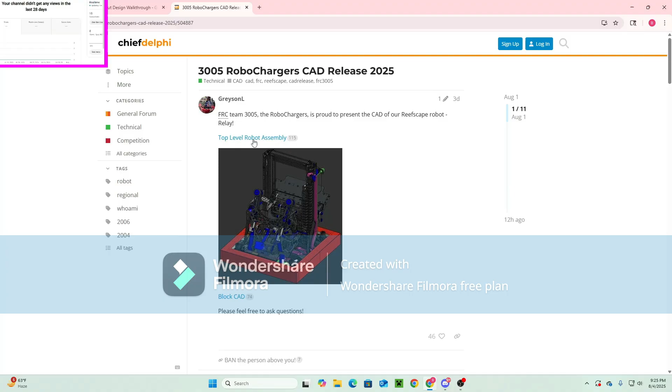The big part about this end effector design is it's using a centering flap for mechanical auto-align scoring. And the RoboChargers' design is really where most of the inspiration for this mechanical alignment scoring came in. This was their end effector system, and what they would do is they would use this flap to mechanically align to reef branches by ramming this into it and score efficiently that way. And as you can see with my design, it is incredibly similar. It has another very similar version of mechanical reef aligning, but there are of course some differences which I'll explain as I go on.

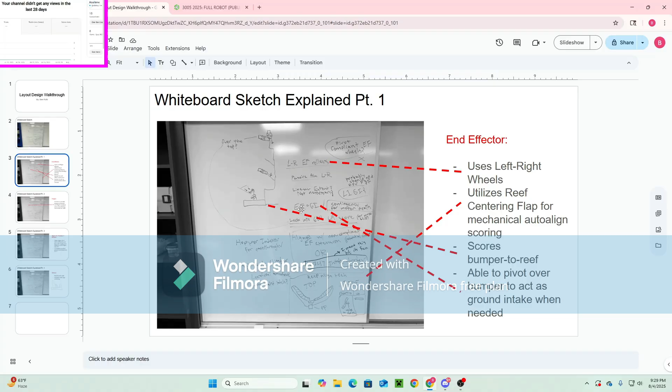It will score bumper to reef, so it's better for drivers. We can ensure that the angle of our robot is the same on scoring every time if we just ram into the reef. And one of the main parts of this design, which I did not sketch, is this whole system is going to be on a pivot which can rotate out and over the front bumper and act as a ground intake when needed. So, that's the end effector explained.

The hopper, it's the same angle as the reef branches. It's as low to the ground as possible so that you can chuck coral into the robot while it's maybe even a foot away from the coral station. And it's indexing coral with a series of compliant wheels.

Something that I very much wanted to design, at least, is a 2847 style algae intake and shooter.

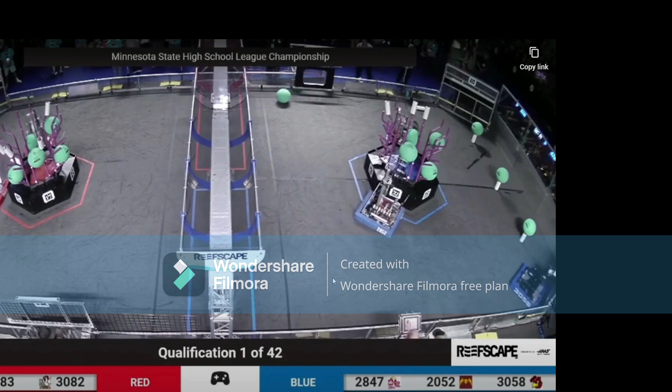Starting zone and scoring in that autonomous grid. Now we're into teleop. Drivers have taken control. Oh, very close match, all tied up at 50 apiece. A lot of scoring going on. Blue Alliance just delivered not one but two to their processor, and the Red Alliance human player gets those, shooting it and tossing it into the net.

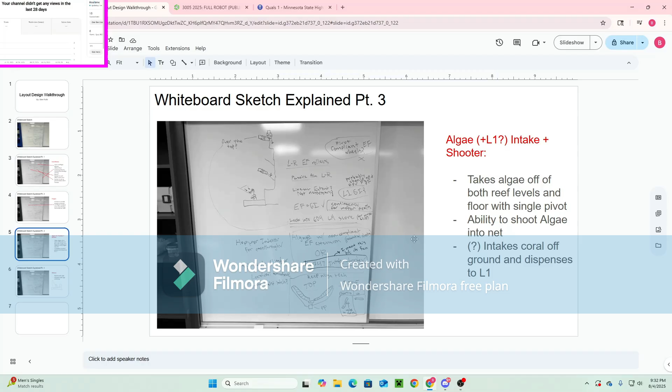I think this style of algae intake is incredibly awesome in my non-expert opinion, and I would really love to build it myself. So this is the mechanism I'm very interested in designing, and I did plan on having a different form of algae scoring that would have been attached to the elevator, but I chose to opt for this other option because of two main reasons. One, I want to make sure that if the end effector wheel motor is broken, this robot can still do something else in a match other than climb and play defense. And two, I really want to design this, and I think it's going to be fun.

Then I had a simple idea for a climber. I want to do a Rest Town style climber and do it right this time. And for my idea, I didn't entirely sketch it out here, but you basically have one half of a triangle on your climber here, and what that allows is for the first pull of the cage to always center in.

What this triangle does in terms of mechanically aligning is it allows you to ram into the cage and not care about whether the cage is going in this position. So those 4 circles would be the 4 bars of the cage, and in that position you can actually have issues where you don't climb correctly, so this kind of solves that problem. And I think it would be way better for mechanically aligning than the solution that I tried to cook up in season.

So that is basically my whole design that I've sketched out already, and now I'm going to be tracing it out in a layout sketch form, and then going at least into a little bit of detail on all of the mechanisms themselves individually.

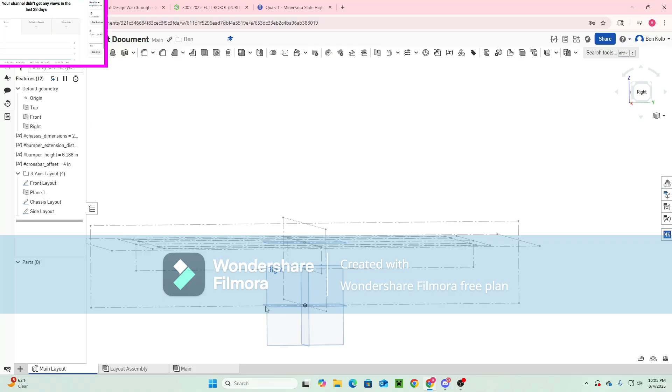Alright, so when thinking what to do first here, there's really multiple things you can do. What I want to do is going to be a little bit out of the ordinary. It's actually going to be creating a new part studio and call it Spacing Simulator. What I'm doing here is I'm just using this part studio to sketch out specifically where I might want my wheels to be.

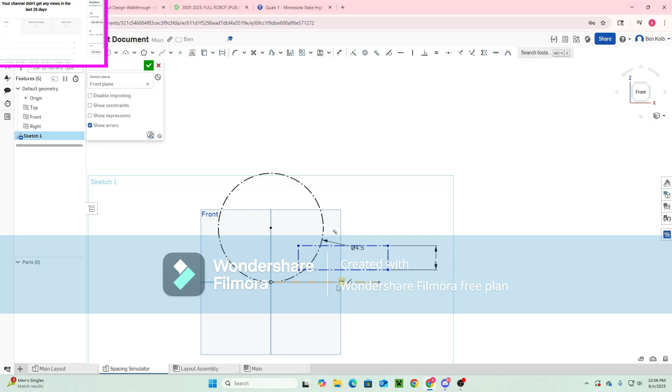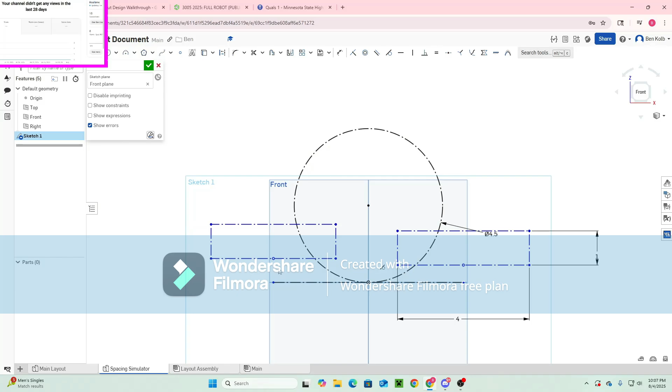What diameter wheels? In particular, I like 4-inch diameter wheels because they have the widest area you can get for compliant wheels. And what I'm going to do here is I'm going to model 2 wheels, and I'm going to use some constraints to make sure that they are in the same position on the x-axis of the coral. So now I can move them around, and they're going to be at the same position. Now with more constraints, I can make them fully constrained. So now they're always going to be at the same place relative to the coral.

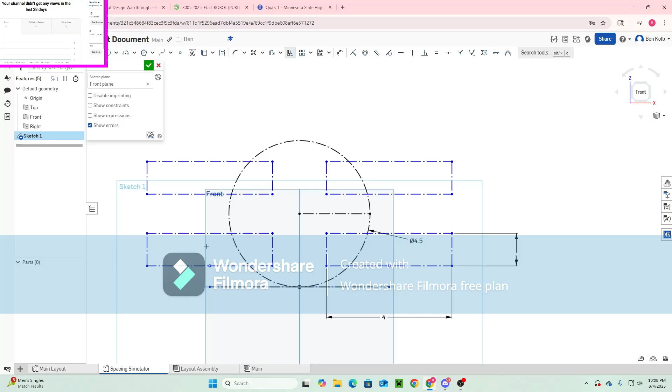Now what I'm going to do is I'm going to do a simple radius line from inside the coral, and I'm going to mirror the 2 wheels. And now I have exactly what I want. I want to be able to play around with the wheel spacing to see how far they come in contact. That looks good to me. So now I have the basic layout of how I want my wheels.

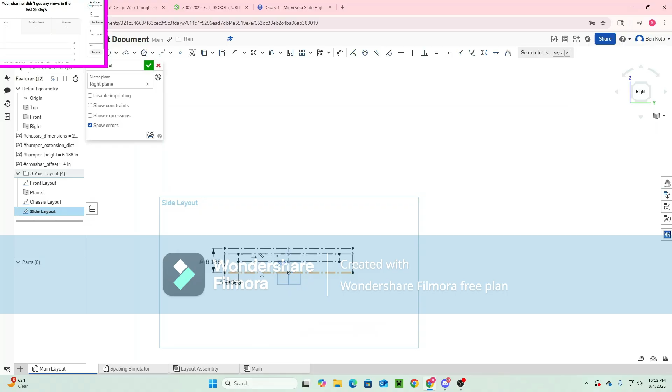And the most important thing that I got from that is this dimension right here, which is how far apart they are vertically. This is actually the only dimension I'm going to use in my other sketch over here. So I'm going to go in here. I'm going to first draw a little rectangle. Now what I'm going to do is make this 1 inch and mirror another rectangle here. And I can make that spacing exactly what it was in the other sketch. And now I have my perfect little pair of wheels here. They're not at the right angle yet, but I haven't really drawn a single thing. So now I'm going to work on that.

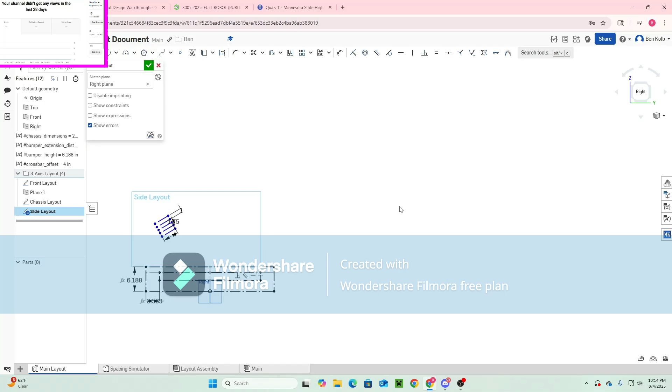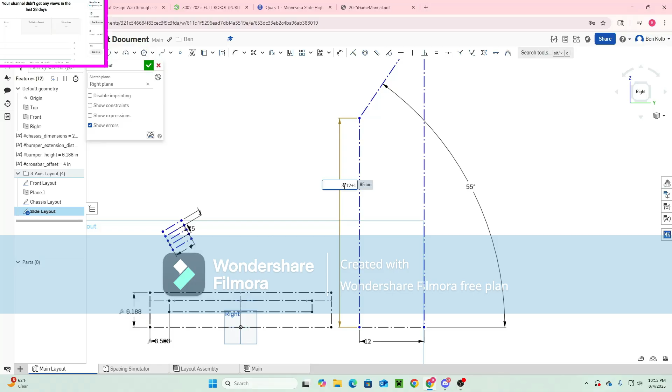But what I will be doing is drawing in a model of the coral station. So I'm going to go to the 2025 game manual, the sloped 55-degree tunnel. Okay, that's all that I really need to know from that. So I'm going to go back to the side layout, and I'm going to draw this, just a nice little parallelogram here. This, I believe it said, is 55 degrees. And this dimension was 95 centimeters. I forgot what it was in feet. Actually, I think I remember. It was 3 feet plus 1.5 inches. So 37.5 inches.

Perfect. So you see, as I'm sketching these things, they're not getting fully defined immediately because I'm adding sketch geometry as I go. The process of making a layout sketch involves a lot of doing things on the fly. So, I mean, that's just really what you have to go for.

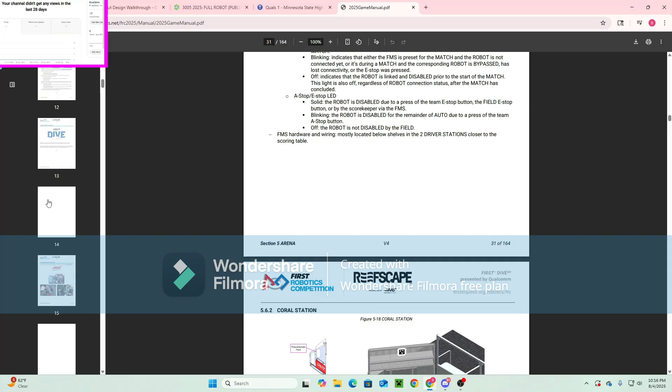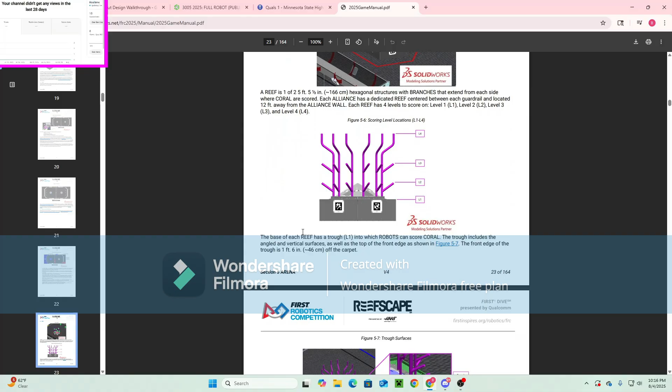So, because I'm doing this video, I'm going to act like I don't know the angle that you need for the reef branches. So I'm going to go back to the game manual, I'm going to select reef, and I'm going to do some reading, look at L1, 2, 3, keep going, and I'm going to see that L2 and L3 are angled at 35 degrees. And that is what we want the base angle of our intake and end effector to be. This is because if our pivot breaks, the majority of the levels of the reef we are still going to be able to fill.

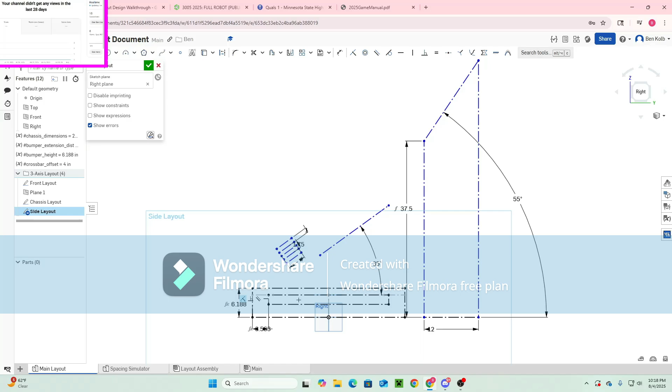And now I can go ahead and start adding a little bit more geometry. So these wheels obviously have to start within frame perimeter, and for the sake of this, I'm going to make sure that I know exactly where frame perimeter is by just extending this line. I personally would like them to be as close as possible, so for the time being I'm actually going to dimension this to be 1/4 inch away. And I'm going to pull this dimension off to the side so I can very easily find it and know in the future if I might want to change it.

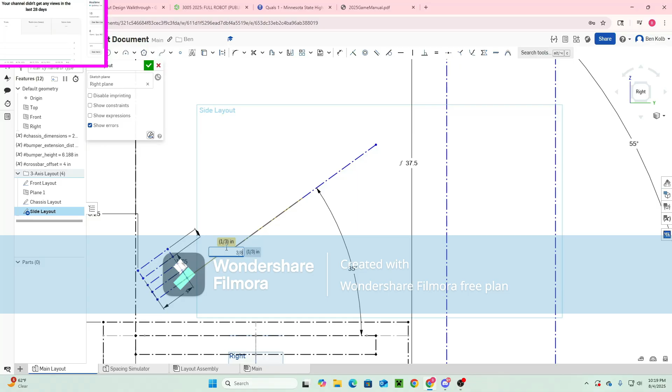Currently, we have this system. We have an intake, basically, that's taking in coral. This is the flat surface of that. Oops. I don't know how I did that. 3/8. And yeah, to make it as low as possible, we can run our wheels all the way down into here because our chassis here actually begins like that. So we can go all the way down even to like here.

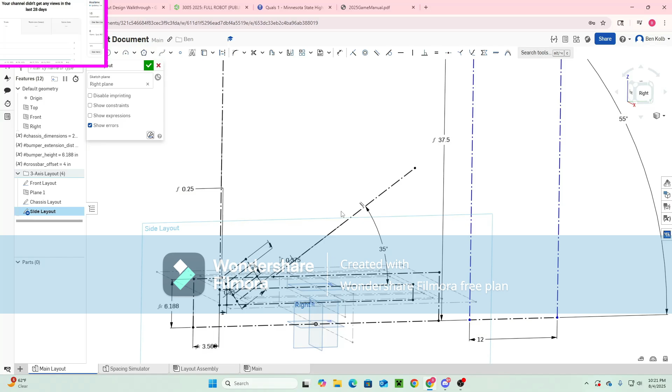We have the position of the wheels for the end effector and the line, which is pronouncing the bottom face of our intake. We can figure out how far we will be able to have our coral go from the source into the robot. So we're basically figuring out how good a job we have done.

And now we get that we can be about 9 inches away from the coral station and still intake a coral.

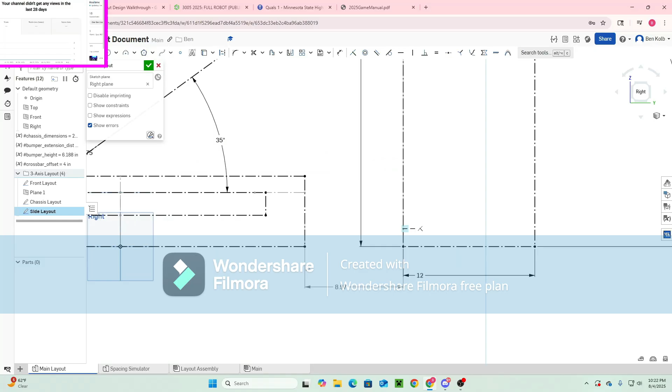Okay, so now what you might want to do is move on to another mechanism. Actually, this sketch probably is not complete because these wheels have a pivoting form which we haven't touched on yet. So this point of the wheels hard stopping on the frame rail bar might not actually be the best because we actually want these wheels to be able to pivot out over our bumper and work as a ground intake.

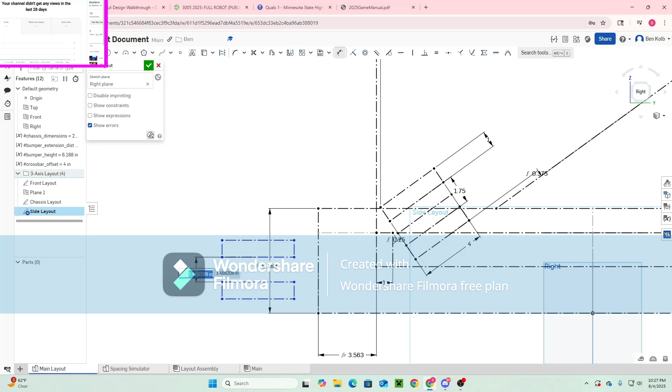So for now I'm going to sketch basically its second position, and doing position oriented sketches is something that is incredibly important in layout sketch designing. And what I mean by that will be pretty clear in just a little bit.

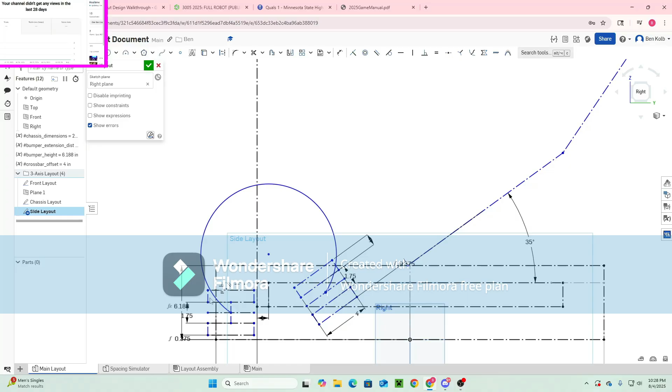Now, what we are going to do is make a pivot point. And what we want is for the pivot point to be inside of the robot, and for these two positions to be in a nice place. This is where layout sketch work becomes a bit hard, because now you have a bunch of things which are moving around because none of the geometry has been decided at this point, and you need to figure out which one you want to be where and how it's going to affect the rest of your design.

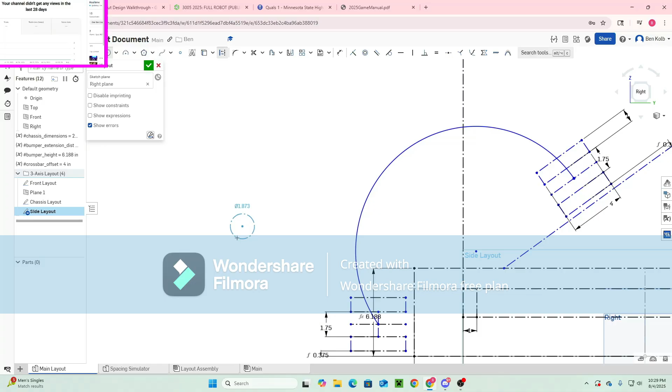So, first things first, this pivot point needs to be inside of frame perimeter. So what I'm going to do first is figure out what's the minimum distance I can get it inside frame perimeter for it to work. Now I can copy this dimension, and I know that this right here is the radius of a bearing with a 1/4 inch of material on it. And that's the minimum amount of material I'd want holding in a bearing.

So the radius of this is exactly what we're going to put in as our distance from here to here, making this the minimum distance for a bearing. And I went ahead and copied that distance, and there it is.

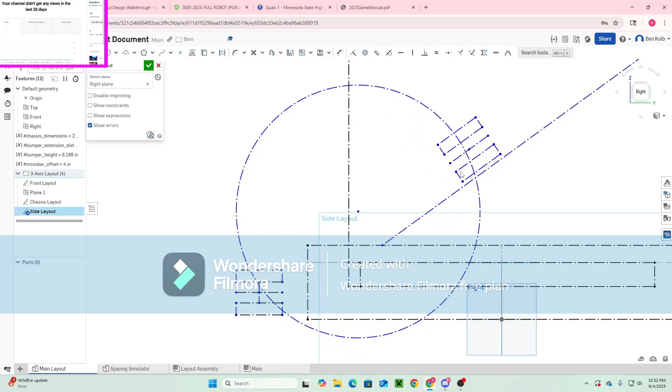So as you can see, now that we have these dimensions, you can start to understand the relationship between the different geometry. Like, I can move this around, and it's basically just moving the pivot point up and down. And if I slide this up and down, it's also moving the pivot point up and down. So the relationship of these two is going to determine how high the pivot point can be.

So what this means is I can constrain this to the minimum position I'd want it to be again, and constrain this to the minimum position I'd want it to be. And now we have something like this. And now what we can do is move our favorite coral end effector around.

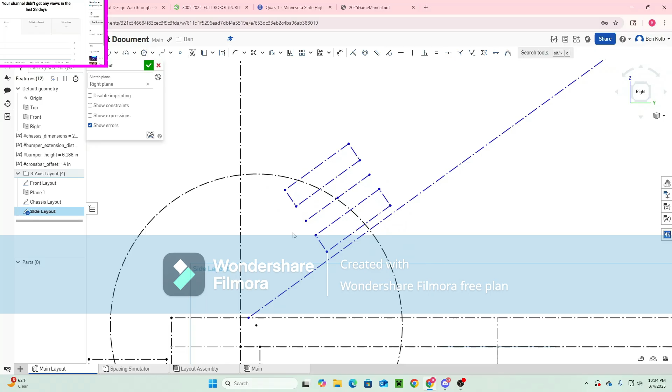The position of this end effector on the pivot in its starting configuration is affecting the position that the robot can be away from this coral source intaking. For now, I'm going to set this to the minimum thing that I want, which is for it to be a coral width away plus a bit of tolerance. I'm just going to keep using a 1/4 inch because it's served us well so far.

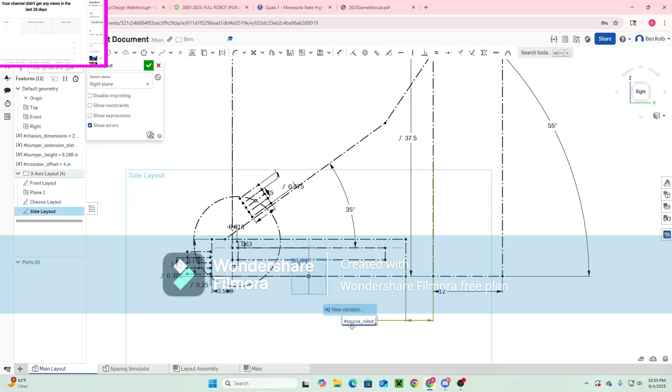And this is actually a dimension that I might forget, so I'm going to go ahead and put it in a variable. I'm going to call it source robot dis. And there it is.

So now what we're going to do is make sure that these wheels in this location, this far inside of the robot, are able to score effectively on the reef. Front edge of the trough is 1 foot 6 inches from the carpet. So this is going to be our first constraint. We're going to make a rectangle from here to here.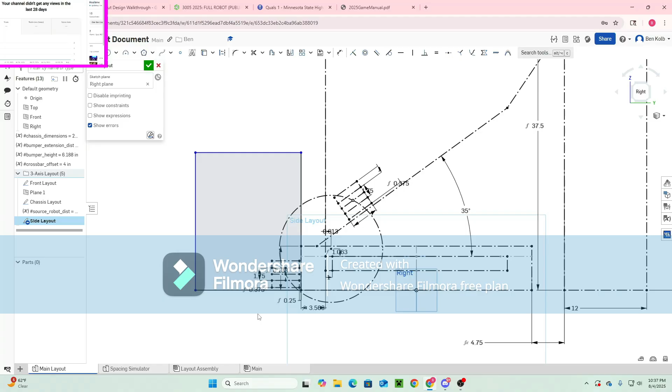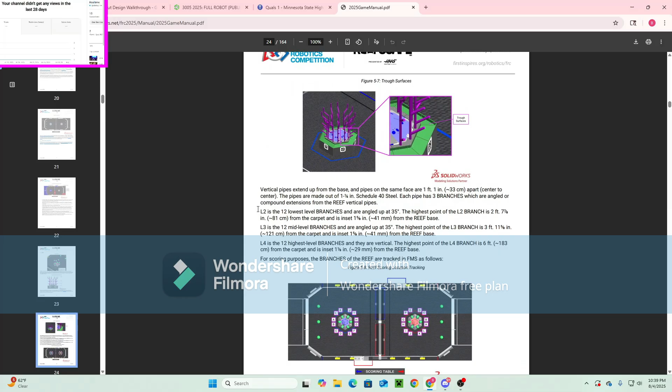All of the reef parts I'm going to make construction because I don't want to get the parts of the intake that are in here confused. I think that I'm understanding it enough for it to be correct. But as a general guideline, there is pretty much always going to be publicly available CAD for the field each year. It just takes forever to look through, so I'm just going to use the game manual instead.

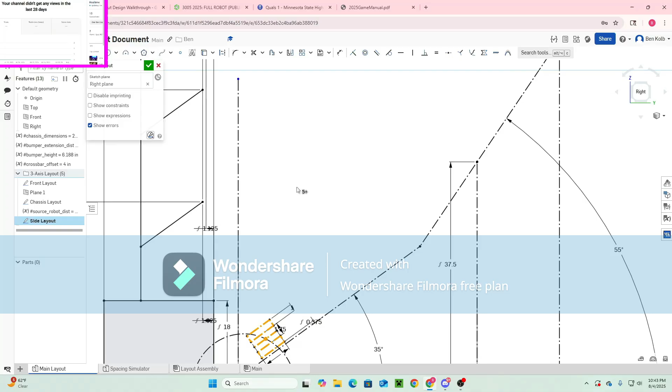Here we go. We have our reef faces, or branches, I should call them. So what I'm going to do from here is select all of this, Control C and then a Control V, and everything is probably going to be, oh, never mind, everything is going to be just fine. Hey, look, it's all good. Okay, so this is now vertical and parallel.

So now what I'm going to do is draw in a coral. Now we have a coral that we can go ahead and score on a reef branch. Let's go ahead and pass this source robot distance. I'm going to go ahead and mate this coral to this for now.

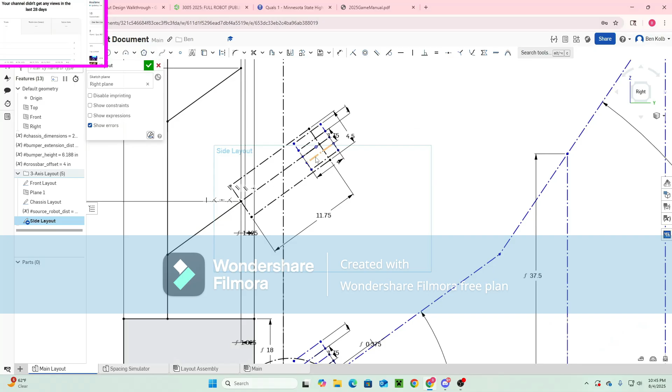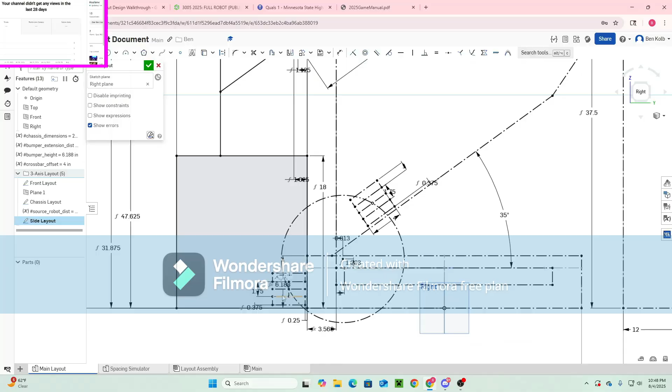Wait a minute. It seems that I've skipped over a little something here because I don't actually know if this pivoting for the ground pickup is going to clip into our bumpers. So I'm going to go ahead and click the check mark for a second so that all progress is saved, and then go back in and make sure that I've done a good job. So to do this, I'm going to make an arc, and then I'm going to make a slot.

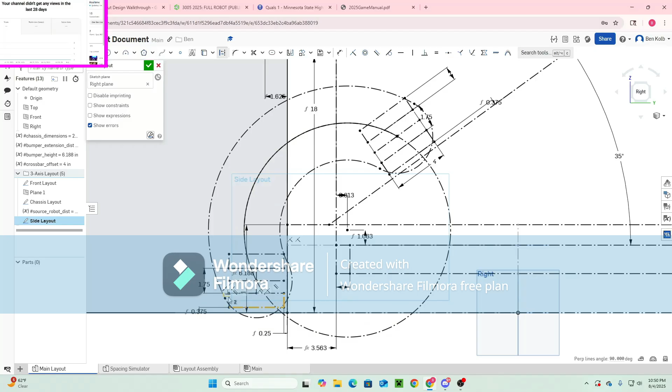I'm going to make this point right here, for real this time. Now I'm going to put this right here, and we are going to see that the wheels will not come into contact with the bumpers. If you wanted to see this further, you actually could because of how copying works. Copying is so lovely, it doesn't actually make any sense sometimes.

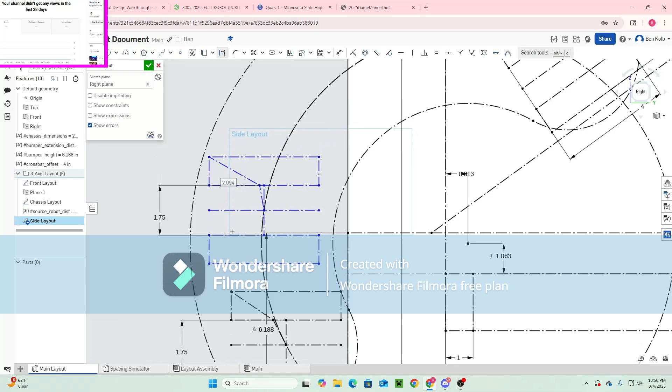I'm just going to go ahead and put this here, and I'm going to make a little line from here to here. I'm going to make it tangent to the arc. Then I'm going to make a line from here to here. So now I'm going to make a line from here to here. A line from here to here. And I'm going to make this equal. Okay.

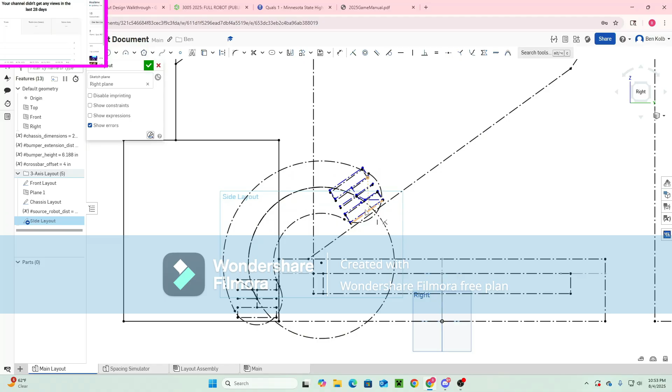Here we go. Now we have a version of our beautiful intake that we can manipulate around our pivot point. Sorry that took so long. Layout sketches are sometimes confusing. So basically what I've gone and done is I mapped out the start location, the end location. I made this lovely pivot point with geometrical factors that I intend to use.

Then what I've gone and done is made an arc and a slot around my range of motion, ensuring that I will have a design that's able to go through without causing any interferences. So this first part of the layout is done. That took way longer than I thought it would.

How long is this recording? 48 minutes. It's hard. Building a robot's hard. Anyways,

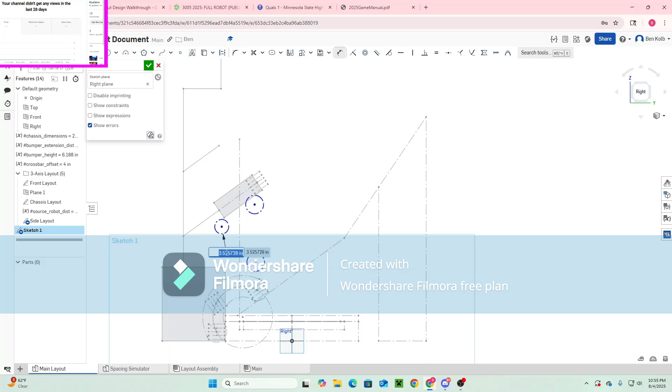now what we've gone and done is a pretty good thing. And now that we have this lovely reef sketch, I'm going to go ahead and design the other mechanism, which is going to be in this view, which is the algae manipulator. Here we go. I'm just going to make a floating pivot point in space, and I'm going to make a floating pair of wheels. Let's call these 3-inch wheels.

Now I'm going to sketch in an algae, or I think it is. I believe that they're 16 inches. I should probably check. So I'm going to go back to my table of contents, go to algae. Each algae is 16.25 inches. Okay. It's a simple dimension change. Oops. Not 26.25. Here we go.

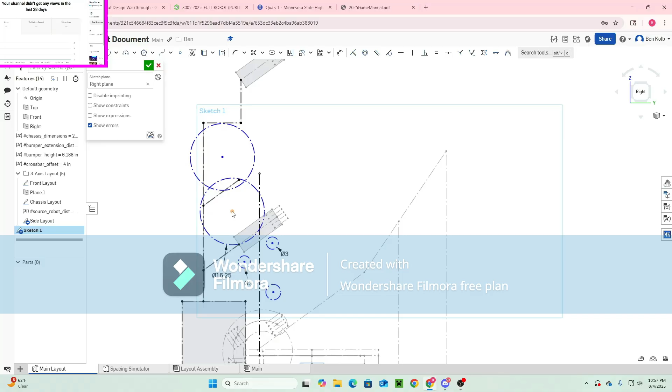And I believe that they rest... I don't quite know how they rest. I actually would like to see. Actually, I bet I can look on the field CAD. We're gonna do center distance. X is 6 inches back and 51.575 inches up. So here we go. We have 2 wheels, which are going to be used to get algae.

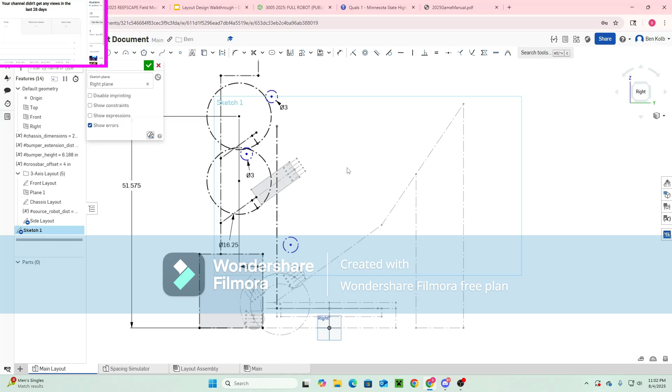And basically, what we need to do is to have this mechanism work, right? To have it pick up algae off of the 3 positions, the top, the floor, and the middle algae. They can't be at the same X position away from the coral source with a single pivot. And that is 100% okay. But for the sake of designing, I want to make sure that the distance away from the top one is the same thing as the distance away for ground intaking.

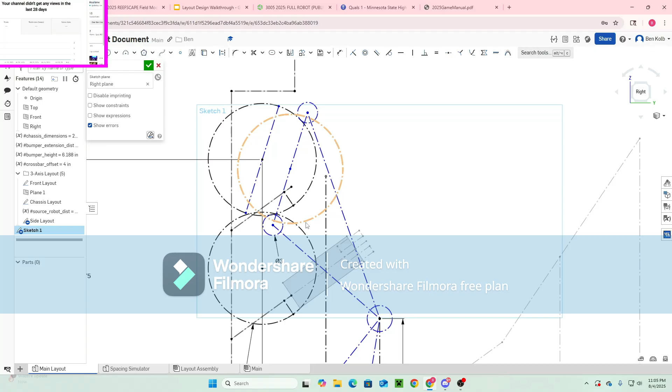Okay. So here we go. This geometry is already a little wonky to figure out. Oh no. Oh good lord. Anyways, I'm gonna do some blank constraints so that I can move this around for the time being. So what I'm gonna do here is I was about to model this off of a random dimension based on just how far I wanted this to be able to take it in, but instead I'm going to model it off of compression, which is a lot surer way of doing things.

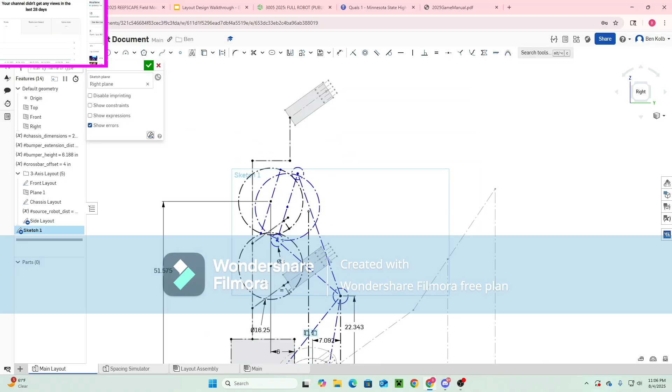So basically what I've done is I've just put an algae inside of this intake. So it has the position inside the reef and the position inside of the intake at the top. And what I want from this is I want a certain amount of compression. So the distance from this wheel to this wheel, I want to be 16.25, the diameter of the algae, minus a certain amount of compression.

Which I will have found through prototyping. So now we have the top basically mostly modeled. If you move this pivot point around, it's still there. And if you change the orientation of the wheels, it still is modeled in the same spot pretty much, with the same compression in mind.

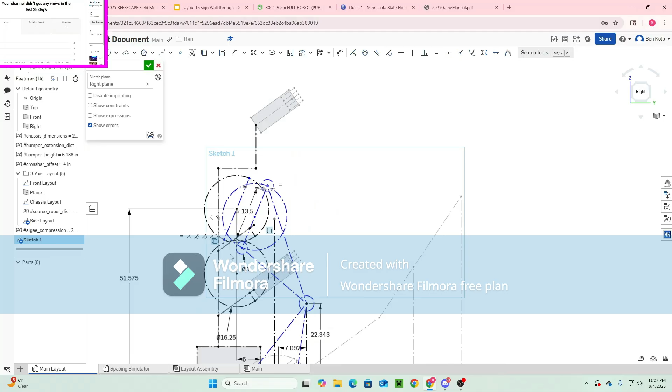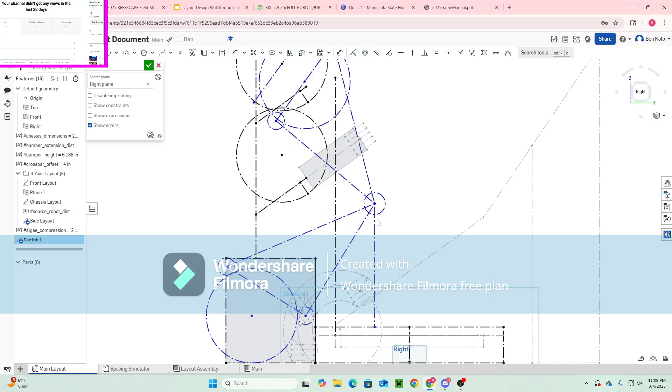So now that that's settled, we can work on the ground algae. And the big thing is making sure that it's over the reach of the bumpers. And to do that, now we're going to adjust the location of the pivot. We're going to move it out. We can add a dimension for now between here and here. And this pivot point can still move around. It's still not fully constrained. And this basically means that we have a lot of flexibility in our robot of where this pivot point can be.

What I'm going to do now, oops, I don't want to make this tangent anything. What I'm going to do now is make this horizontal and sketch out a third. So here we're at a bit of a halt. We don't have our sketch defined, and defining it based on nonsense isn't really a good idea.

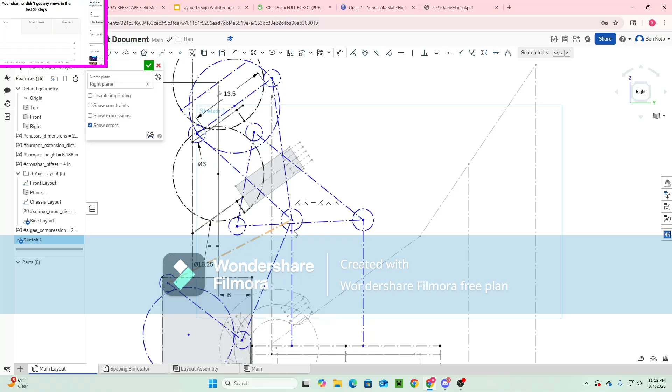So for now, we're actually going to leave this and figure out the situation of our elevator, because that's going to affect where we want this pivot point, because we probably want it out of the way of the elevator, but we also might be able to move the elevator out of the way of the pivot. This currently doesn't have a position inside of frame perimeter, so we are going to go ahead and help it out.

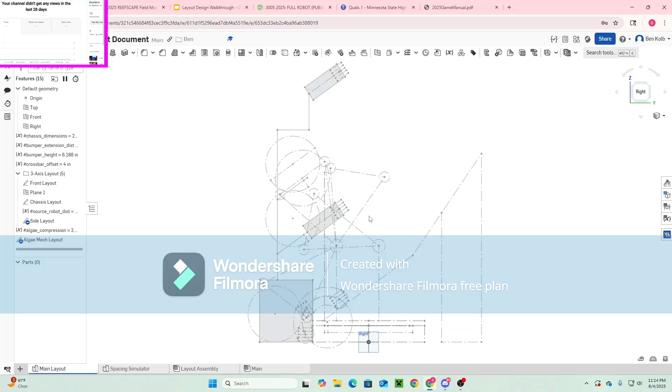We're going to make a fourth position, and it's just going to be one that's inside frame perimeter. That is our beautiful mechanism that is not defined in any way. And because we've separated that from the rest of our geometry from before, this is so much less complicated than it would have been if we added it to all of this nonsense as well.

Okay, I'm back. So at this point in our design, we pretty much need to get a place for the elevator. Now, this mechanism, I think, will need to be on the side of the elevator. So the elevator will probably need to be to one side of the robot, and not the other.

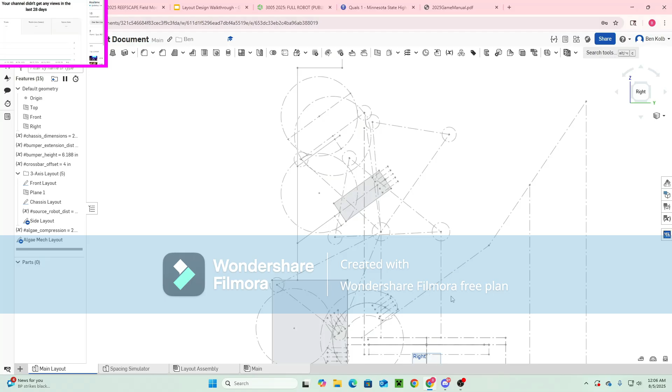So it seriously does not matter where the elevator is for this design. It could be back behind the wheels or it could be in front of the wheels. It would be able to pass through in either case. It's really just how connected of a system do we want, and really it's where do we want the climber. So I'm going to go back to the side layout, and since this is our frame rail, I'm going to start it on the inside of the frame rail.

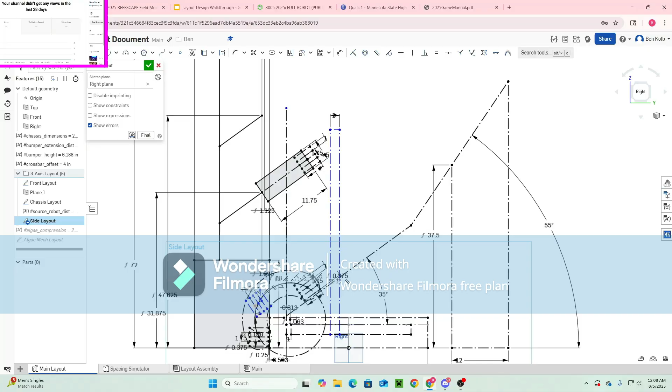So we'll need a 3-stage elevator. I already know this just because that's what literally everyone needs. Actually, we might not. Let's see, how much extension is this from this point to this point? We need whatever that is in extension. Let me try go here and do some MKCAD. Here we go.

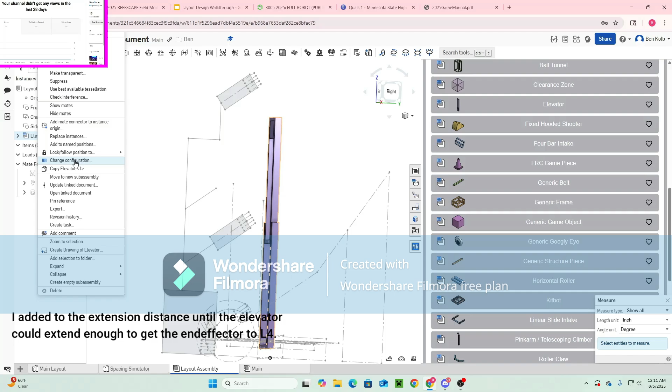Okay, there we go. We have our beautiful elevator. It's as tall as it needs to be. The top of this from bottom is 43.75 inches. I want to find starting configuration. Starting configuration max size. May not have a robot perimeter greater than blah blah blah. Be more than 3 feet 6 inches tall.

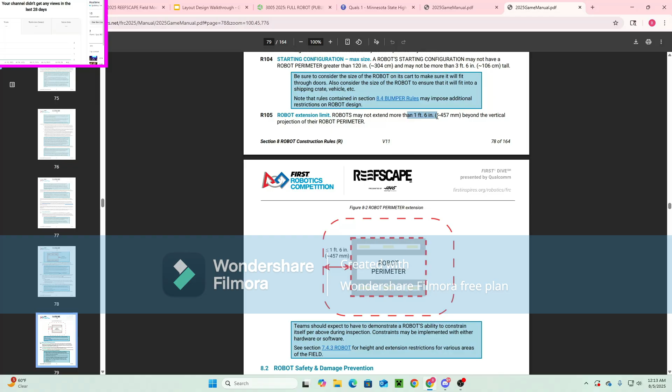So 3 feet 6 inches. So 3 times 12 plus 6. That's 42 inches. So this is too tall. It's too tall by 2 inches, so making this 3 inches should make it not too tall. 42.75. So still too tall, but that's okay, because now we can go ahead and change it. Is within starting. So this is perfect.

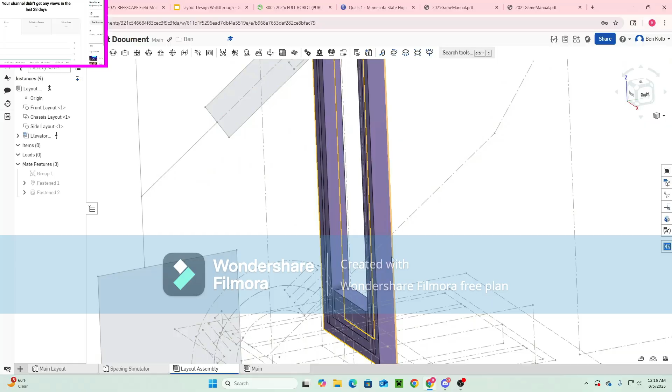This really is kind of the fastest way to make an elevator. We have our elevator that fits the starting configuration, and now I can just copy these lengths. 38 inches. Here we go. That's the carriage. This is the beautiful elevator. Side view. Perfect. And like I said, it can really be anywhere. All of our things can really be anywhere. They can all change. This is not in starting height at all.

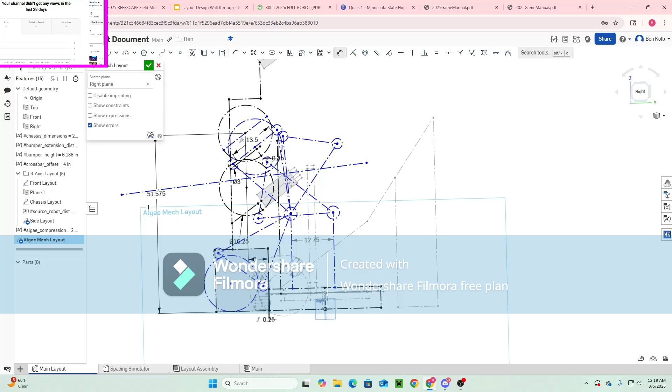So I think it's time to fix that. 42 inches. So I'm going to look at the reference material a bit. So it looks like they curve it all the way into their robot, which I didn't expect, but that looks like a good way to get this to fit in. Okay, I just realized that I haven't talked in a while, but basically what I'm doing is I'm making some of the positions different so that this can fit inside frame perimeter nicely.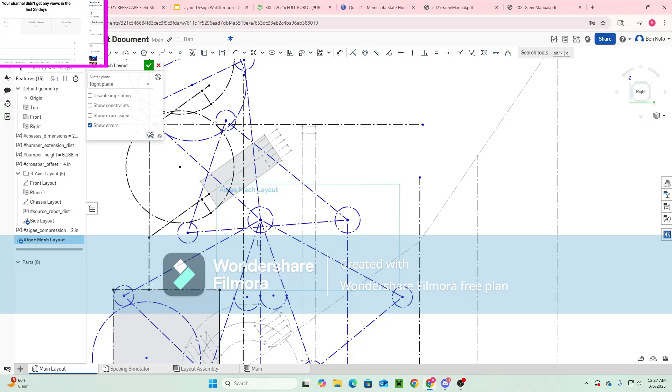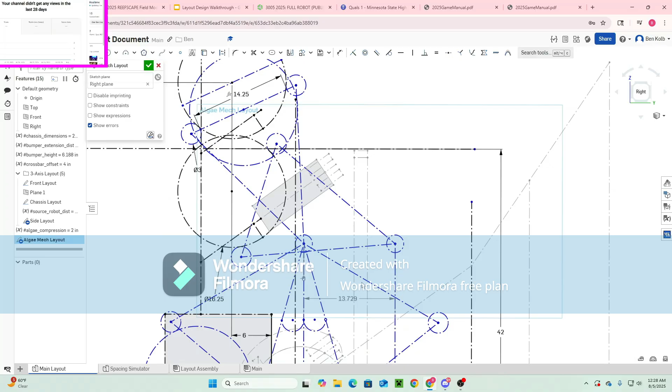And it all works now. Oh, looks like this might be our final dimension. So let's just put this wheel inside the robot now. Maybe instead let's control it with this. We want to be able to have a 6-inch sprocket. This thing might be heavy, so having a sprocket that's able to be up to 6 inches, pretty good. So there we go. That's the algae layout fully constrained.

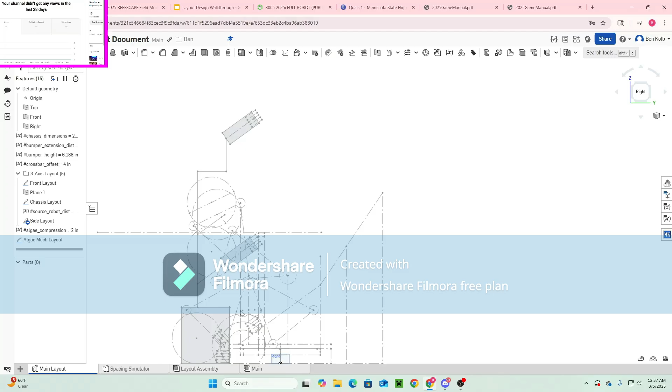Now, I believe we can constrain our layout here, because this is 5.5 inches. You can go back here and just make this 6 inches. So, right here at this point in time, we basically have the entire layout done, which some people might be a little bit confused by, because we haven't sketched the climber yet at all, or the front face of the elevator. And one of those things does need to be done, and that's the front face of the elevator. I forgot that a little bit.

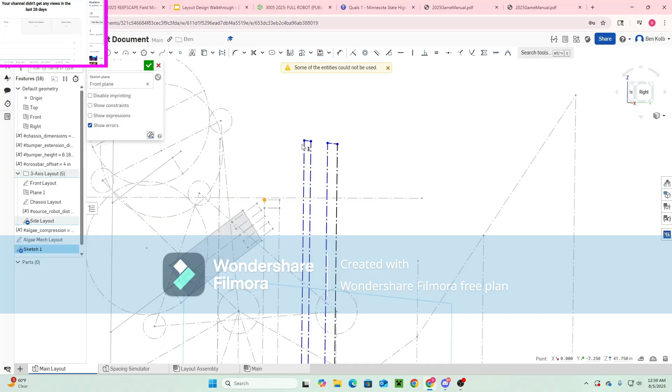We have our 2 outside elevator pieces, and we know how tall they are from here. So we can actually use features of other sketches and other planes. Okay, so there we go, that's the elevator all done. There's 1/2 inch between the bars for the slider bearing blocks. And yeah, that's the basic layout.

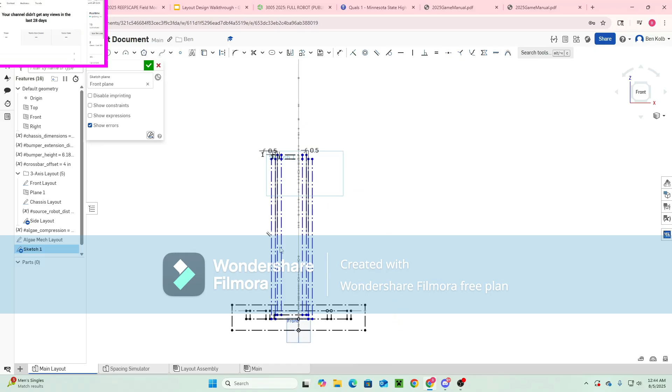As you can see, we can, oh, whoopsie daisy, hang on. I forgot to use dimensions correctly. As you can see, we can move this side to side because we don't actually know how wide we want our elevator to be yet. And these dimensions are entirely accurate to what we've done in Crayon CAD. So, yeah. We can even do the carriage, which I forgot to do earlier.

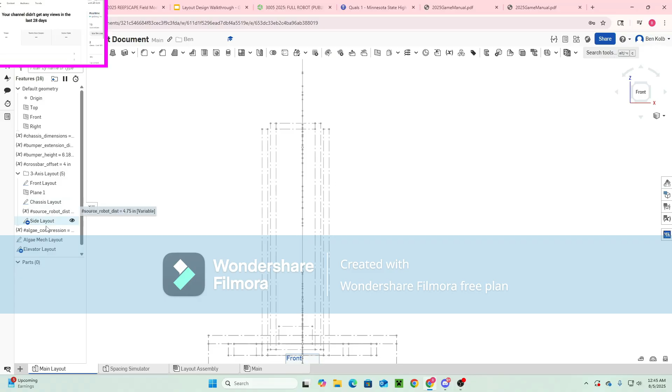So now we can actually head back over to our spacing simulator and see pretty much exactly how wide we need the inside of our elevator to be. So it needs to be bigger than 10.75 inches, so it can be 11.25 inches. I like the sound of 11.25, so I think that's what I'm going to use. 11.25 inches. There we go.

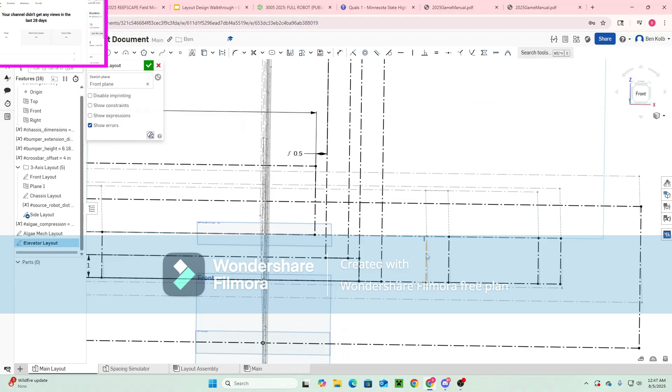So now I'm going to assume that the room we need for our algae mech is some space to the right. And because of this, I'm actually going to go ahead and do this at 1/4 inch here. So now we can go ahead and move the frame rails to reflect this new situation. So the distance here is 2 inches. We want to make that a 1/4 inch plus 1.75. And there we go. That should now reflect our new lovely placement for our elevator.

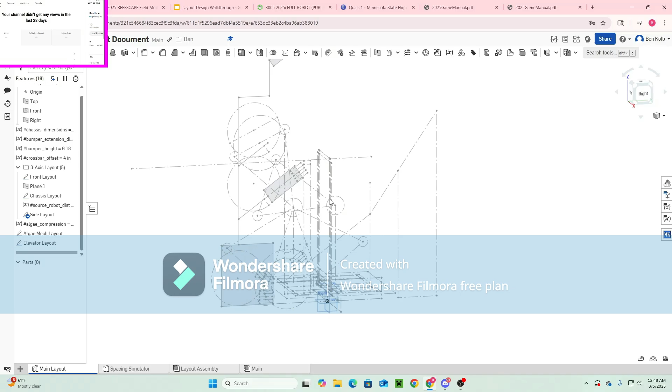Anyways, to make this elevator layout reflect the position it has in the robot, I'm going to do a plane point on this point, move it above this elevator layout, and then just remove the front plane and click this plane instead, and all it does is move the sketch to the position where the elevator is. This has almost all the information you need to divide up your mechanisms and start work on the actual robot. It's so close, we just have not done the climber yet.

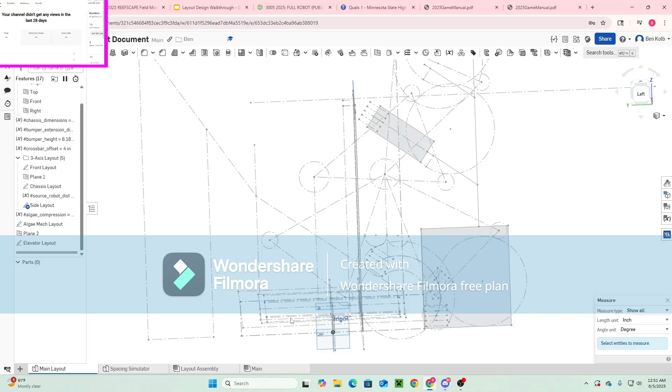Have it ram in here. So, we have 16.5 inches here. I'm going to make a sketch on the right plane. This is going to be the climber layout. First thing I'm going to do is make a midpoint for the room. I assume that the climber should be a little bit closer to this side, so I'm just going to make a little line where I think the climber should be. I'm going to keep that other thing as a reference. I think it should be roughly 2.5 inches to the left of the midpoint. I think I'm thinking a little bit too hard about this when in reality I haven't even done the right sketch.

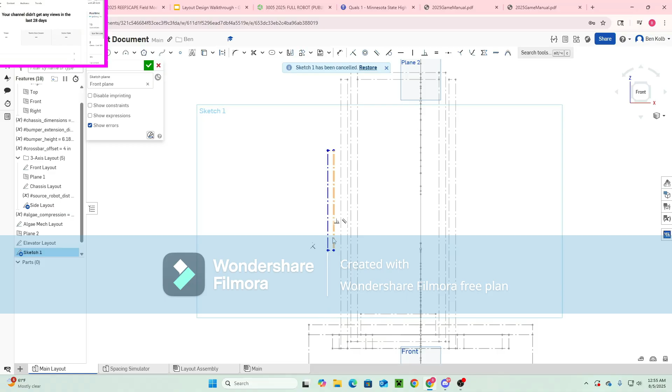So I'm going to go over here on the front plane. The climber should basically be right here. I'm going to do a 1/4 inch plate, which is going to be the centering guide. It's just going to be an 1/8 away from this, and it's 1/4 inch thick. So this is going to be 2 inches, and this is where I'm going to have the cage pipes. Here's roughly how far out you want your gusset to be, like 6 inches, that should be good enough.

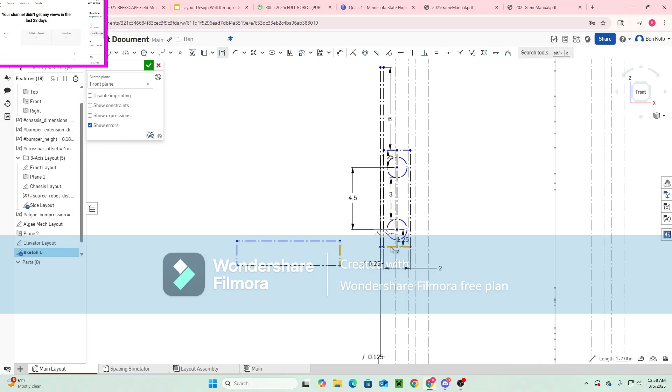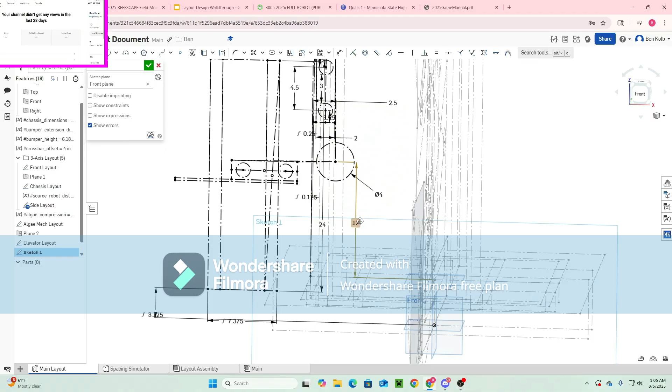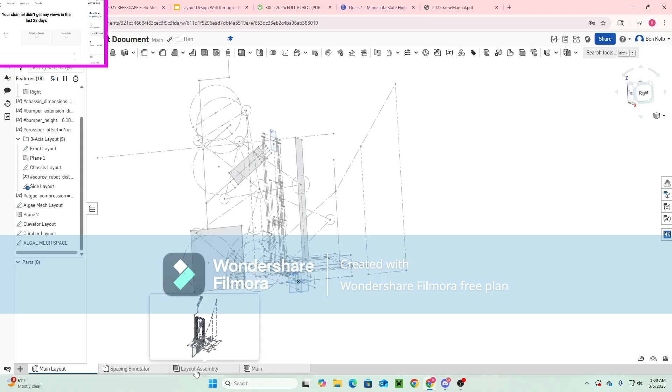Again, any dimensions I want to keep separate, I just move them off to the side. So this looks pretty good. This climber will stay up here for the majority of the match, then it can go down, then it can go all the way in. Looks perfect. That's all the geometry you need in this document. So anyways, this is the main robot layout. Next steps are going through each mechanism and defining it further with more layout sketches so that you can create a layout assembly with moving geometry.